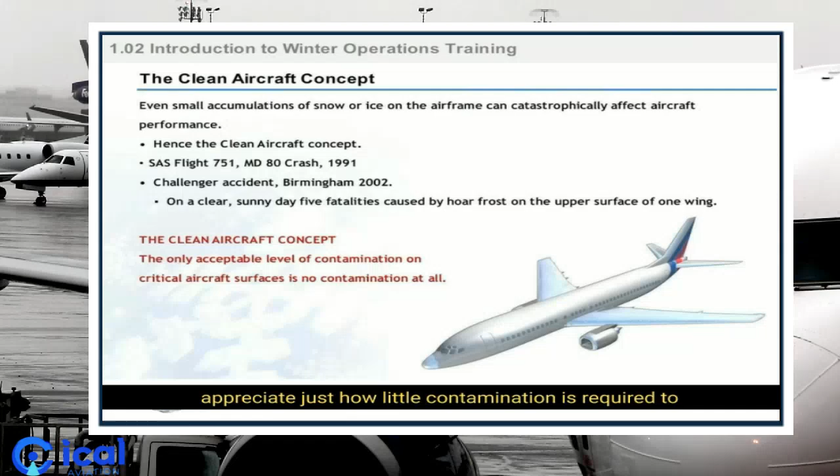For many years it's been known that even small accumulations of ice or snow on the airframe can catastrophically affect aircraft performance. This led to the introduction of the clean aircraft concept, a philosophy which insists the only acceptable level of contamination on critical surfaces is no contamination at all. Despite this, some flight crew still fail to appreciate just how little contamination is required to cause a significant deterioration in performance.

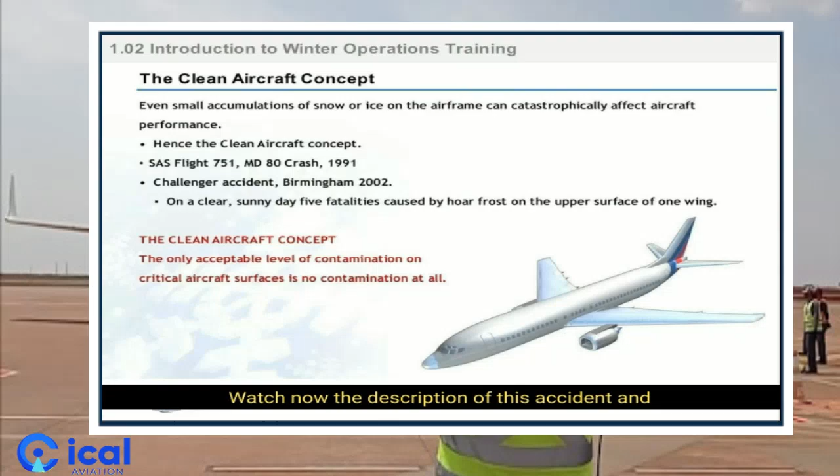In January of 2002, 5 occupants of a privately owned Challenger died when their aircraft attempted to take off with a light covering of hoar frost on one wing. Watch now the description of this accident and take serious note of just how little snow and frost on a wing surface can severely affect the performance of your aircraft.

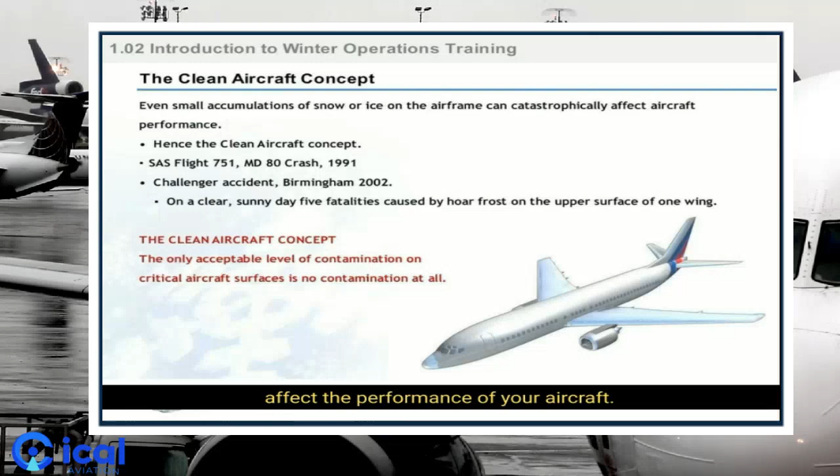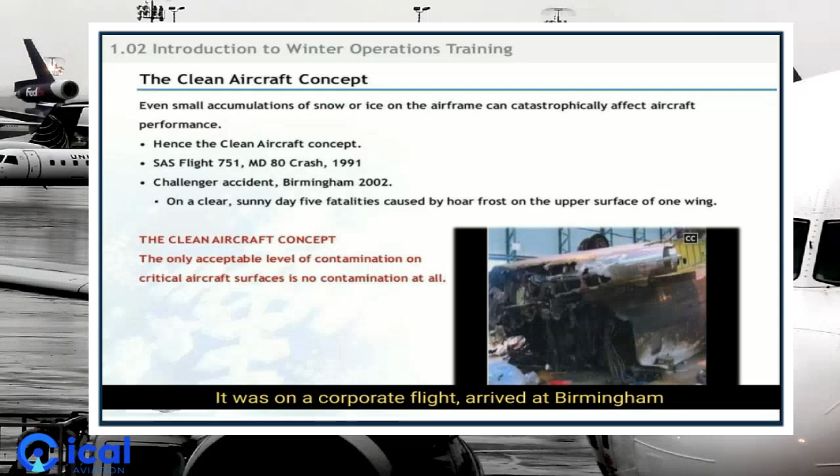This is a Bombardier Challenger 604, a Canadian-built, American-registered aeroplane. It was on a corporate flight and arrived at Birmingham at about 8:40 in the evening on January the 3rd, 2002, with 3 passengers and 2 pilots on board. It was a night stop in Birmingham, followed by a planned departure at midday the following day.

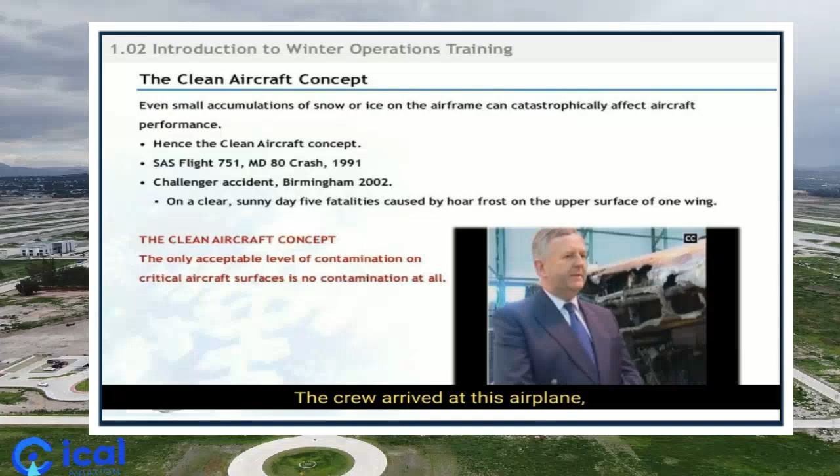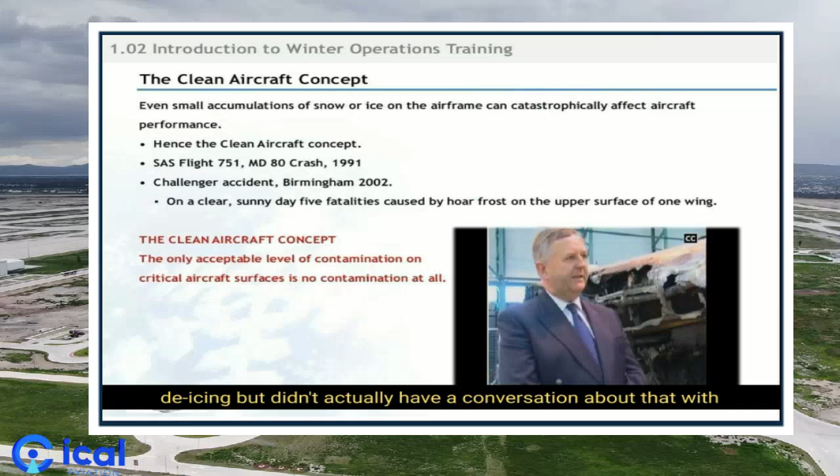Overnight, the temperature dropped to an unusually cold -9 degrees Celsius, and there was quite a heavy frost. The crew arrived at the aeroplane around 10:30 to 11 a.m., ready for the planned midday departure. Prior to their arrival, the handling agent had assessed, certainly from the left wing, that the aircraft would probably need de-icing, but didn't actually have a conversation about that with the crew, although he had it in the back of his mind that they would probably be asking him to arrange de-icing sometime that morning.

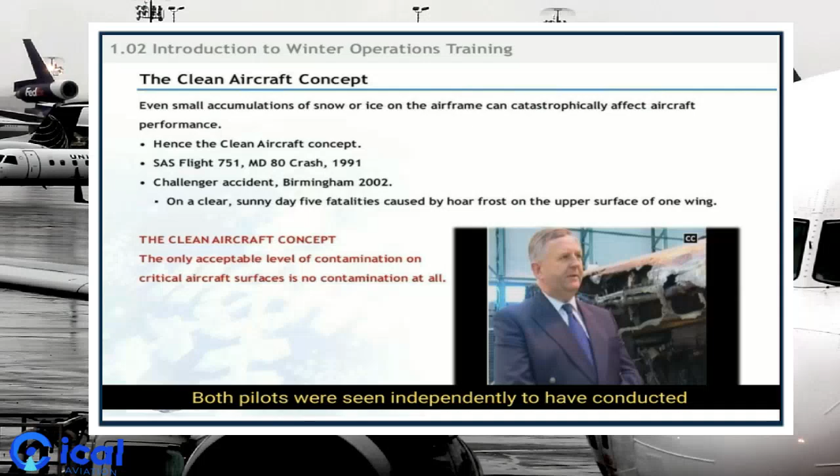Both pilots were seen independently to have conducted an external check of the aeroplane before going on board to do their pre-flight checks. As it happened, the passengers arrived at the aeroplane and were boarded, and no de-icing was asked for.

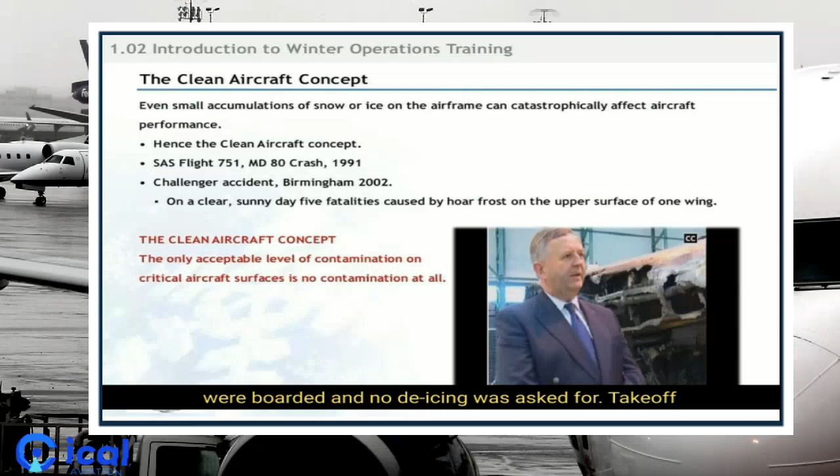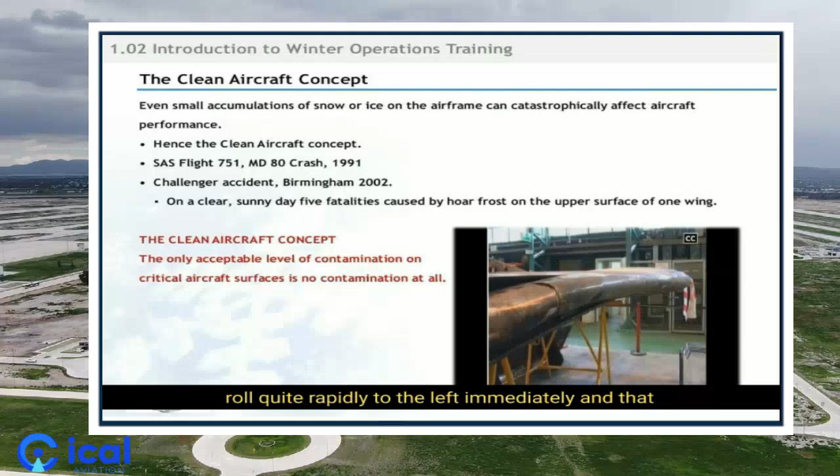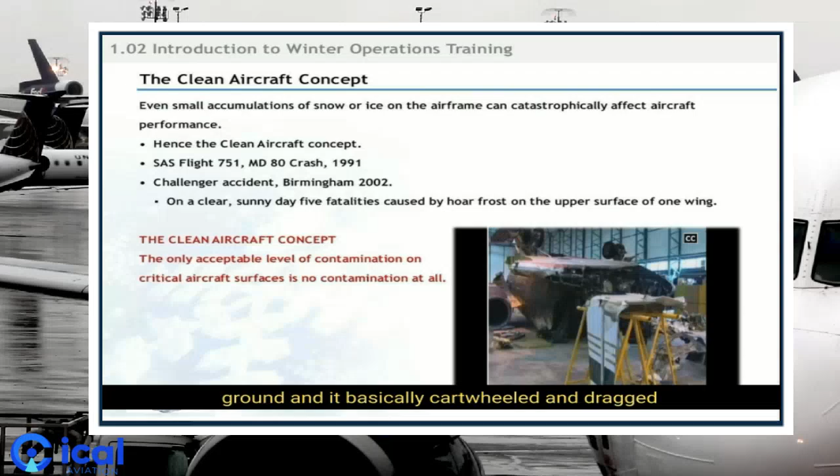Takeoff roll was apparently normal up to the point of rotation, but as the aircraft rotated, it started to roll quite rapidly to the left immediately, and that roll continued such that the left wingtip and winglet struck the edge of the runway. The aircraft continued to roll left, the nose of the aircraft hit the ground, and it basically cartwheeled and dragged itself across the centre of the airfield. The 5 occupants were all killed during the impact sequence.

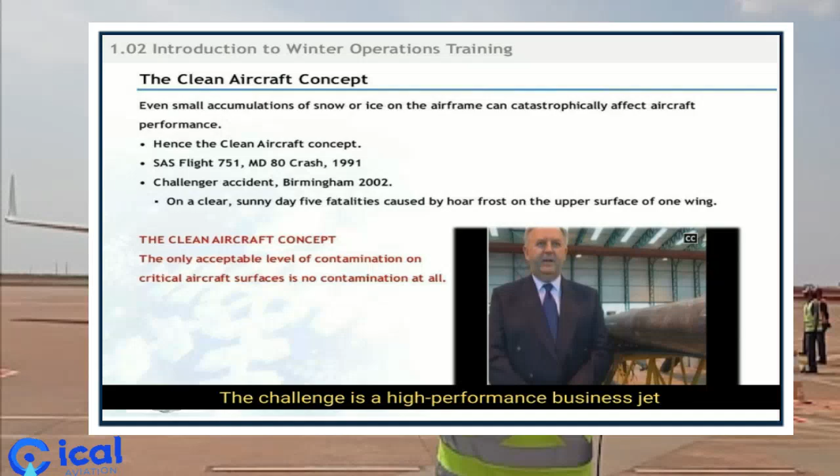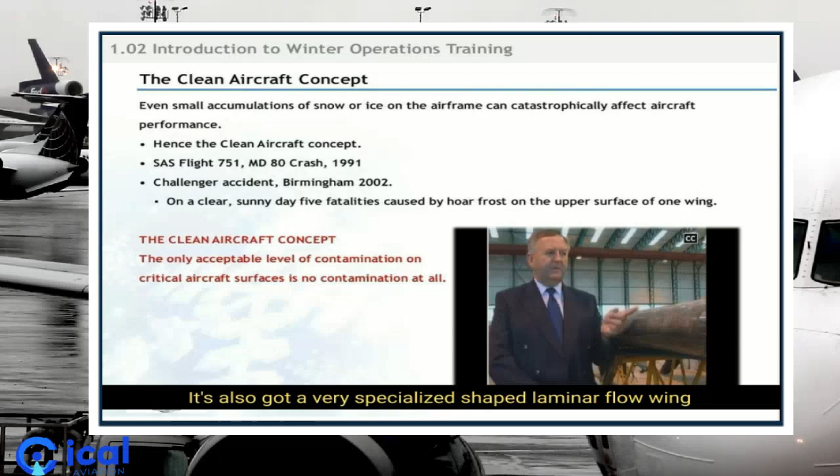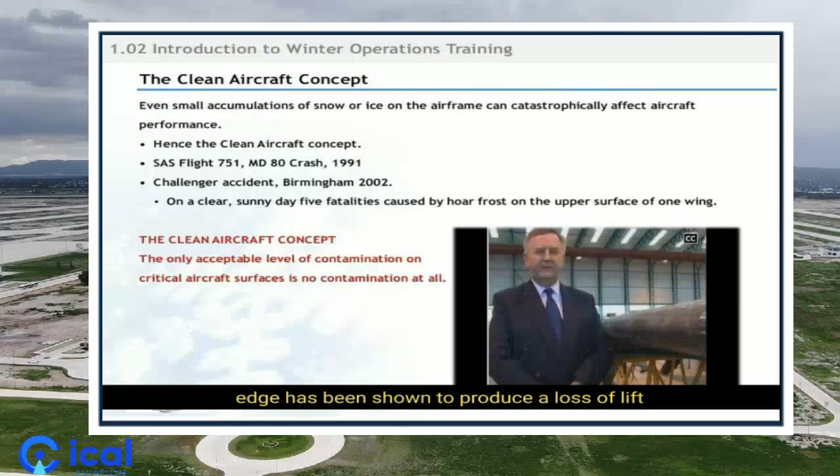The Challenger's a high-performance business jet design, which has a supercritical wing design. It's intended to be most efficient in cruise flight. It's also got a very specialised shaped laminar flow wing leading edge, and any sort of roughness on the leading edge has been shown to produce a loss of lift of the order of 15 to 30% for even small amounts of accretion up to the size of fine sandpaper.

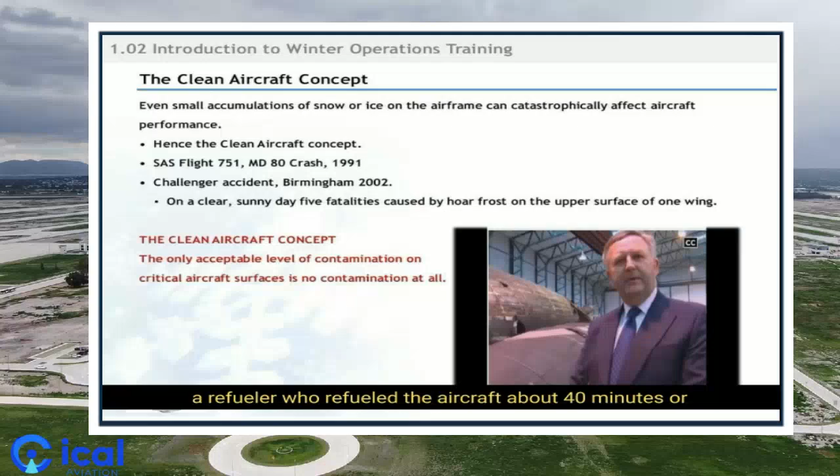From the eyewitnesses who were around the aeroplane that morning, we had a handling agent who had assessed that the left wing had a coating of ice, and we had a refueler who refueled the aircraft about 40 minutes or so prior to departure from the right-hand side, who indicated that the frost on the surface of the right wing had actually melted as the refueling process completed.

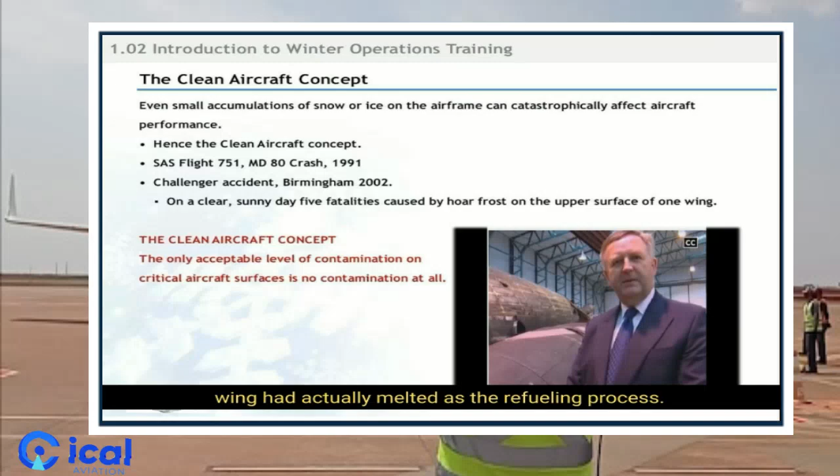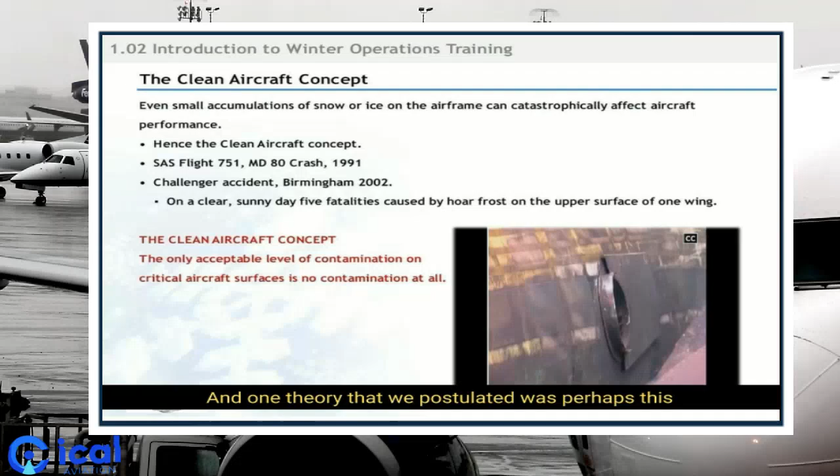We were intrigued to find out the reason why there should be this melting when the temperature was still -2 degrees Celsius. We noted that the aircraft was parked tail into wind, and that the exhaust from the auxiliary power unit actually exited the aircraft on the right-hand side of the fuselage. One theory we postulated was perhaps this exhaust gas, the warm gas, had been drifted forward by the wind and had actually managed to produce a sort of warming microclimate around the right wing.

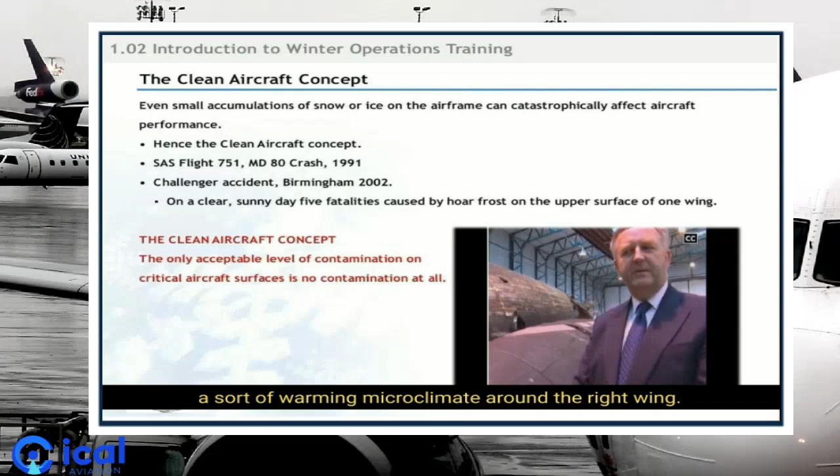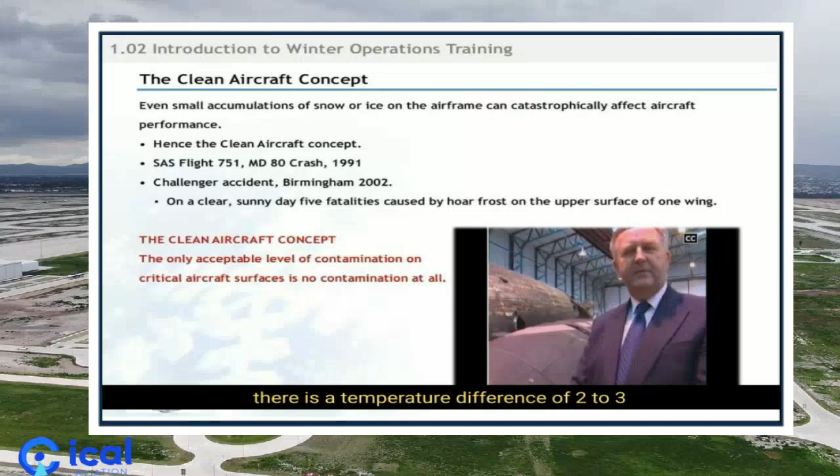So we went to the manufacturer and got a test aircraft with some temperature probes. We did actually prove during the course of the investigation that there is a temperature difference of 2 to 3 degrees Celsius between left and right wings caused by the interaction of the APU exhaust with the tailwind.

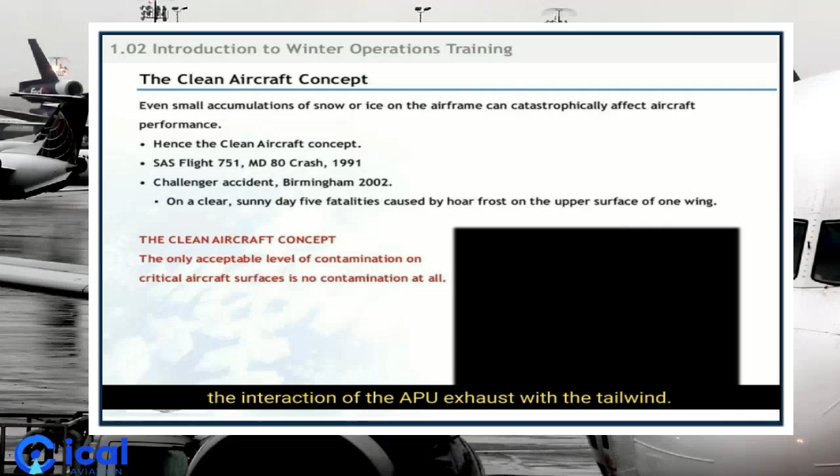The key to operating safely is to obey the clean aircraft concept. But other factors such as ice or snow on the runway, or even a sufficiently cold, moist air mass can significantly reduce performance. So you must learn to recognize and adjust for these conditions.

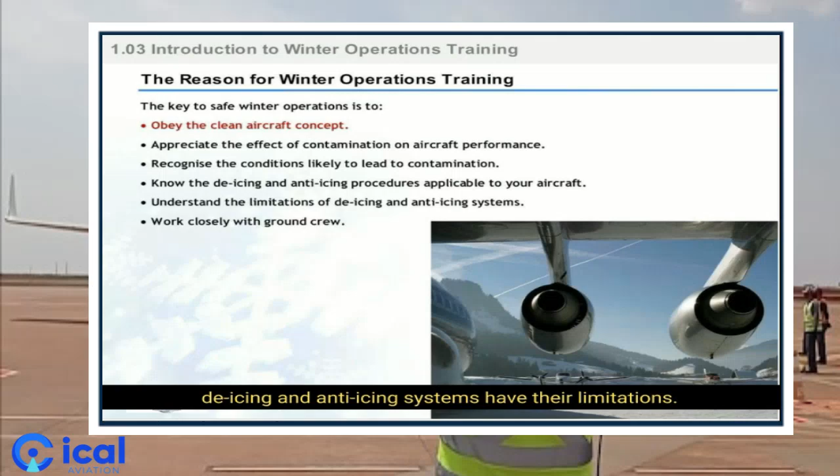You must also know when and how your aircraft should be de-iced, and understand that even the best de-icing and anti-icing systems have their limitations. Finally, you'll have to rely on the skill and judgment of others to ensure that your aircraft is fit to fly. So close cooperation with your ground team is an essential link in the safety chain.

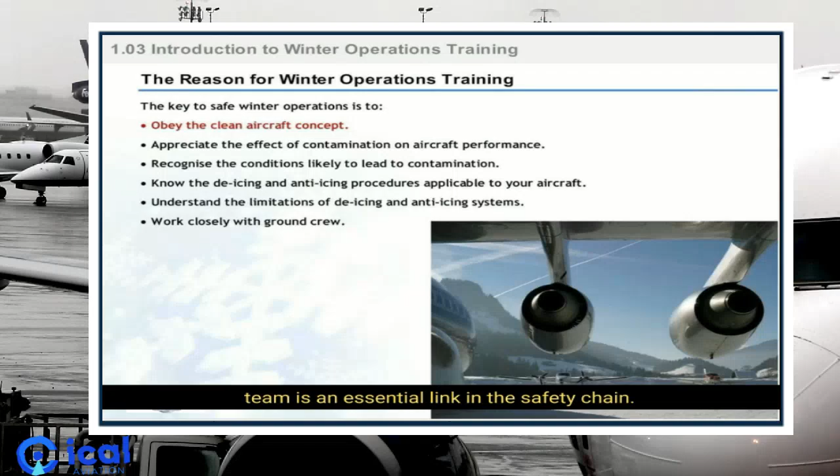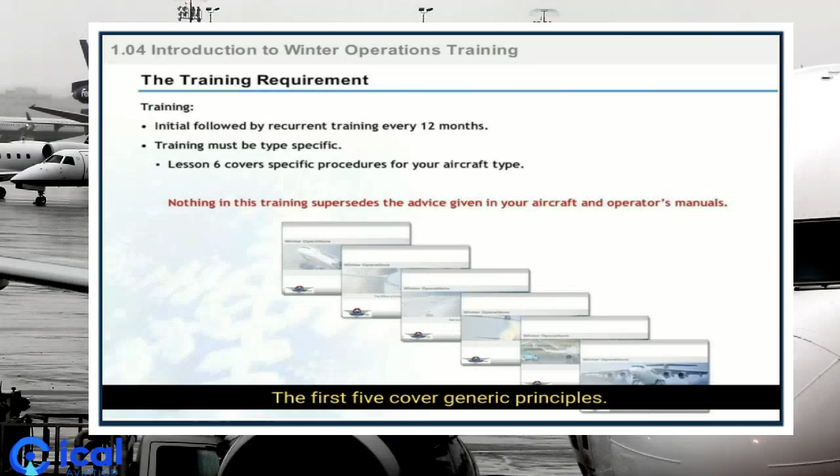All flight crew and ground crew must undergo initial training before they engage in winter operations and must undergo retraining every 12 months. This course comprises 6 lessons. The first 5 cover generic principles. The 6th lesson covers specific procedures applicable to your aircraft and company SOPs.

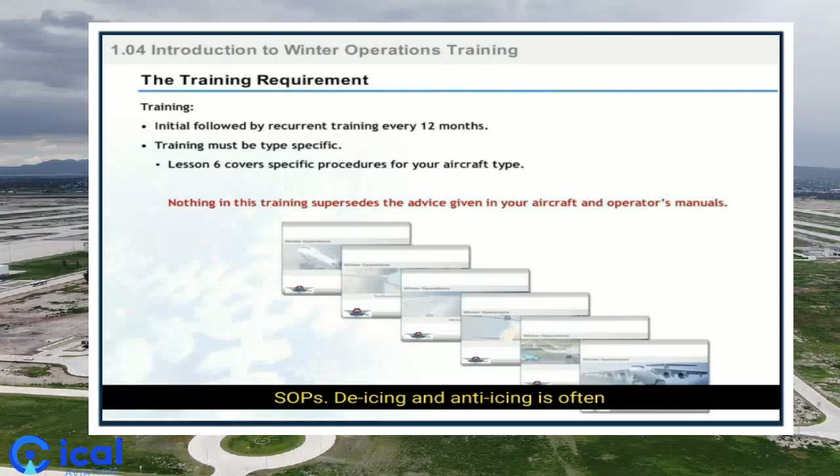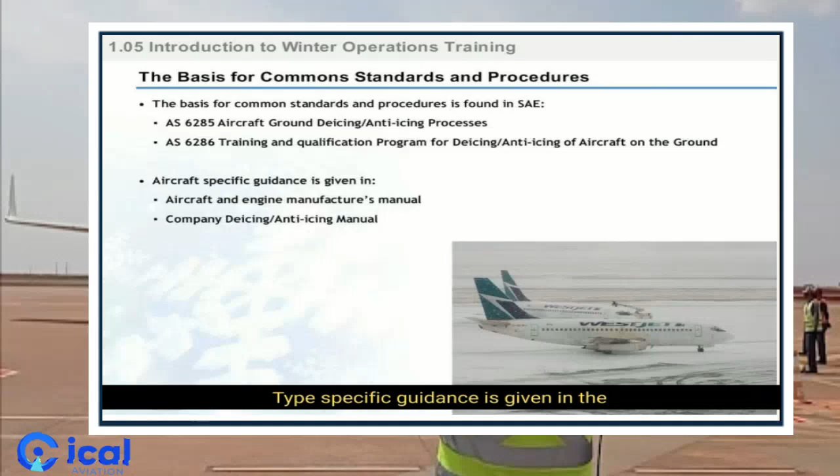De-icing and anti-icing is often carried out in difficult conditions, so the whole team must work to a common plan using defined procedures. These are set out in the documents listed here. Type-specific guidance is given in the aircraft and engine manufacturer's manual, and also in your own operations manual.